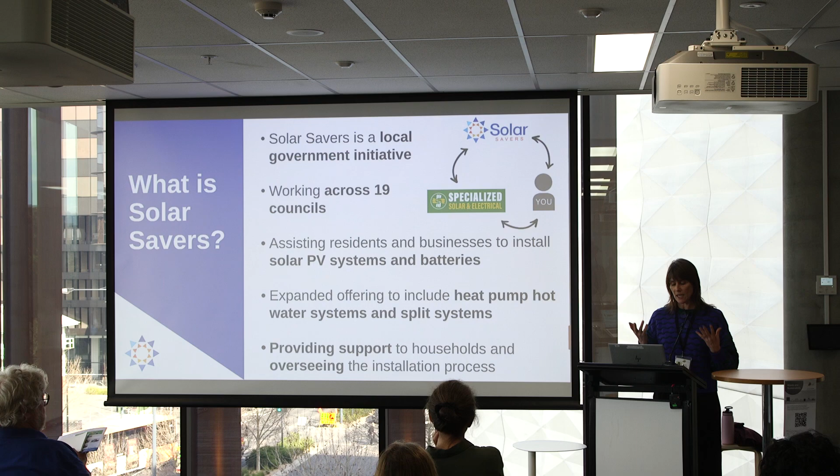Our program provides support and we oversee the installation process from start through to completion. So if you have any queries, we're here to help you along the way. So why would you install with Solar Savers?

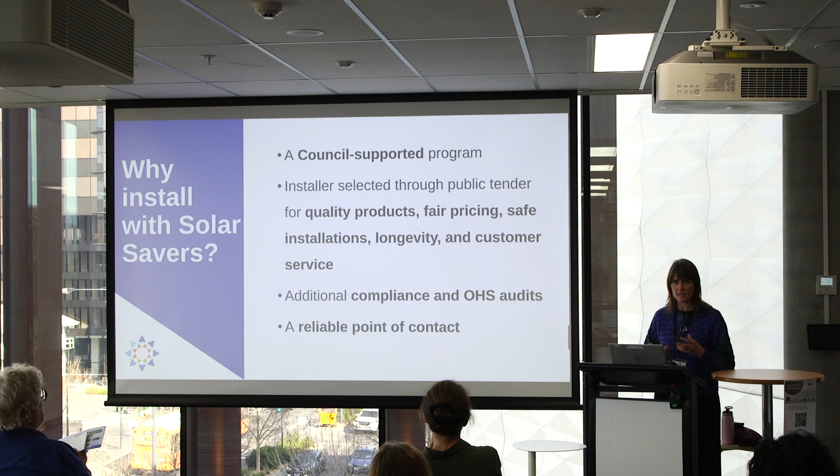Firstly, we're a council-supported program, and we've selected Specialized Solar and Electrical through a public tender process. So through those tender processes, we vet... I'm sorry, you can't hear me?

No, that one there? There we go. Is that better? Yep, yes, sorry. All right, so we've selected Specialized Solar and Electrical through a public tender.

When we went through that tender, we invited several solar companies to apply, and we vet and rate them on their quality of products, fair pricing, OH&S for safe installations, and longevity, making sure they're going to be around for a long time, and negotiate longer warranties as well, because that's really important. We also look at customer service, so actually having a really good customer journey.

In addition to that, our program organises compliance audits. So 5% of all installations, I organise separate audits to make sure that all the systems are installed properly and according to regulations. Your systems are going to be on your roofs for 20 to 30 years, so you need to make sure that they're done properly and safely as well.

I also do OH&S audits as well, making sure that all the installers are behaving, installing safely on your property, and making sure that when they're on site, no one is going to get hurt. We're also a reliable point of contact, with a team you can call or email with any queries along the way. So that's why it's really important to come through the council program as well.

Thanks, Anna. Good morning, everyone. Firstly, I would like to thank you all for joining us today to learn a little bit about the Solar Savers program. My name is Samira Hughes. I am the Chief Operating Officer of Specialized Solar and Electrical.

I'd also like to introduce you to Raymond Hughes. He's our Director of Sales. He will be coming up shortly to take you through to learn a little bit about how solar works, and the products that are available and on offer through the program. So that's just a little bit about us. Thank you so much for attending today. So let's start here. So who are we?

Originally established in 1984, part of the Specialized Heating and Cooling Group, we are a family-owned business. We've got 6 offices across Victoria and New South Wales.

Since the turn of the century, so going on 24 years now, we have helped thousands of households and businesses transition into that all-electric future, going from gas to electric. We help people reduce their energy bills and also reduce their carbon footprint, and we're really grateful to have assisted so many people through that journey.

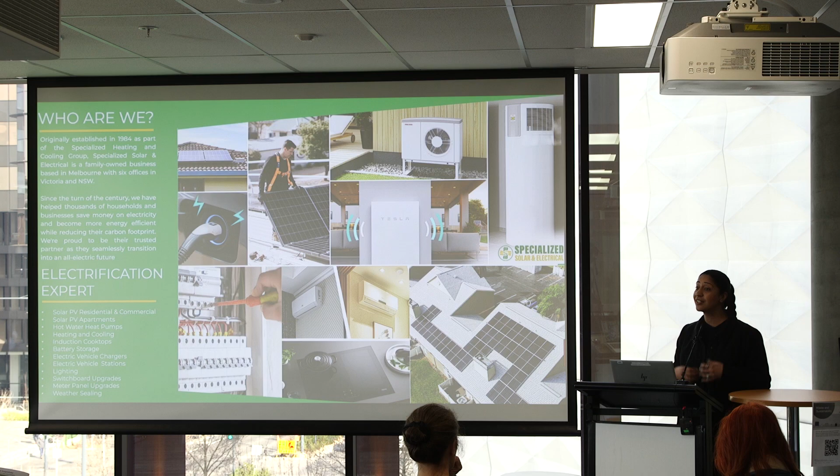We don't just do solar, so we classify ourselves as electrification experts. The reason is we do everything that encompasses electrification for you to transition. Through this program we have solar, batteries, heat pumps, split systems, a few different products on offer, but we also do induction cooktops, switchboard upgrades, and electric vehicle chargers and charging stations. Another reason is because we understand that it is difficult to transition into that all-electric future.

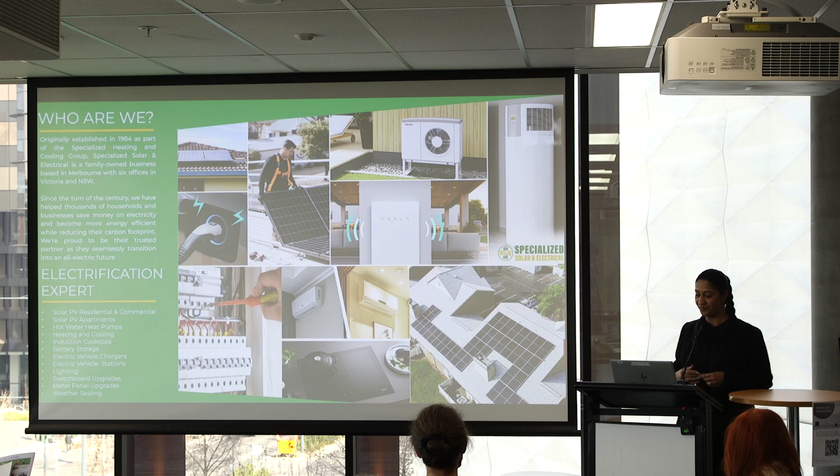So we basically become your partner for life. We know that this doesn't happen overnight either, so we're here to assist you along the journey. Whether you can do something like this straight away, or it takes you 10 years, we help you through that process. Okay, so that is a little bit about us.

So let's launch into it. A lot of the information that you're going to see on these slides is being obtained from Rewiring Australia, so there is a little source website at the bottom. If you haven't gone on Rewiring Australia before, it's got some great information, but some of this is where we pull this information from.

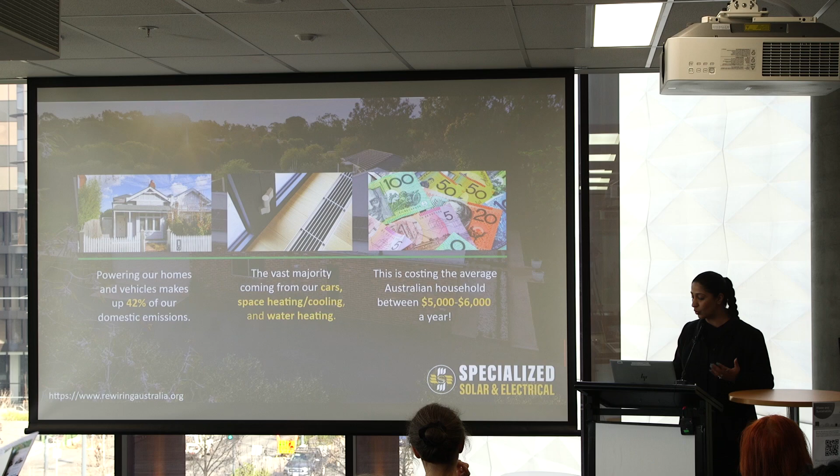Powering your homes and vehicles makes up 42% of our domestic emissions. The vast majority is coming from our cars, space heating and cooling, and water heating. This costs the average Australian household anywhere between $5,000 to $6,000 a year. And again, these are essentials — these are things that we do require, heating and cooling, as well as hot water at home.

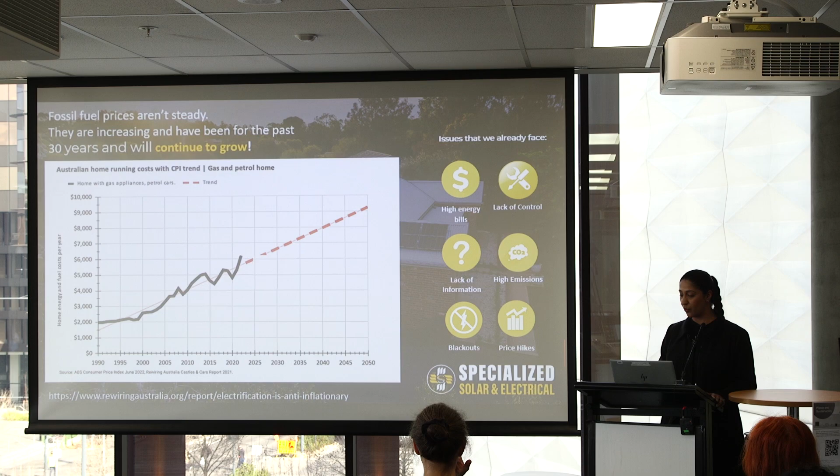Blackout protection — now we are facing blackouts. I know only a few months ago there were so many Victorians that didn't actually have any electricity for close to 3 weeks. So we are definitely feeling the effects of blackouts, high emissions and high price hikes. There's quite a few issues that we're already facing today when it comes to energy.

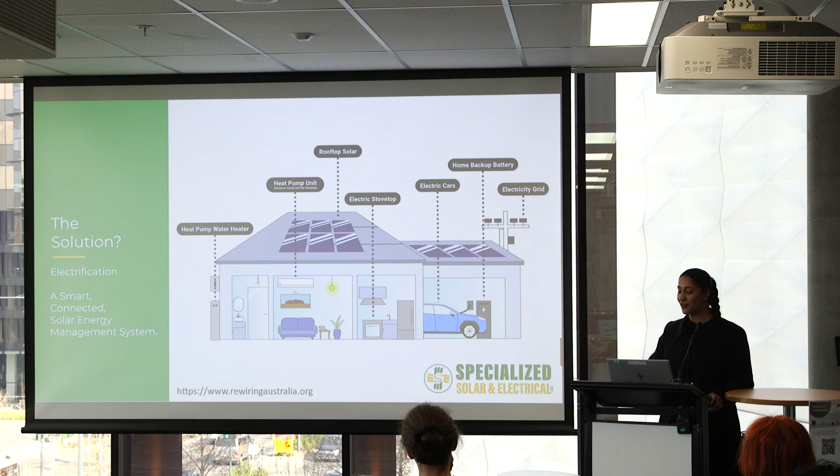So what's the solution? It's definitely electrification — a smart, connected solar energy management system. This is an image we got from Rewiring Australia, basically showing what we want to achieve when it comes to a full electric home. You can see solar panels on the roof, a hot water heat pump on the side of the home, split systems in the house, induction cooktops, an electric vehicle in the garage, battery backup storage, and you're always connected to the grid — unless you do off-grid systems, but with your home you're usually connected to the grid.

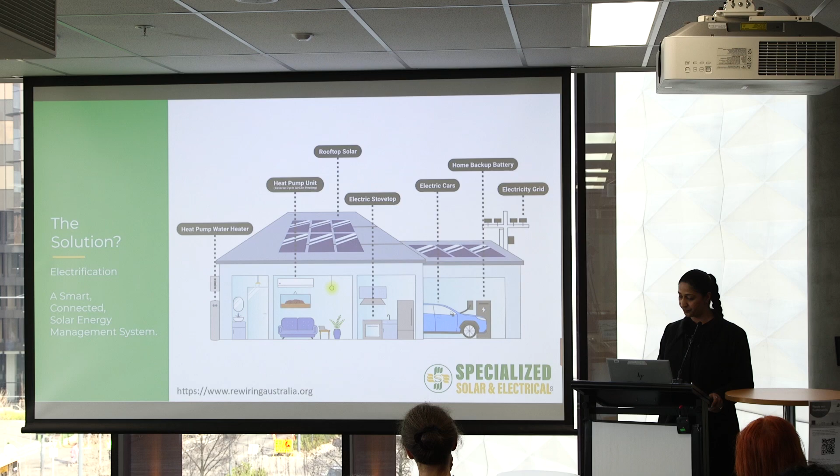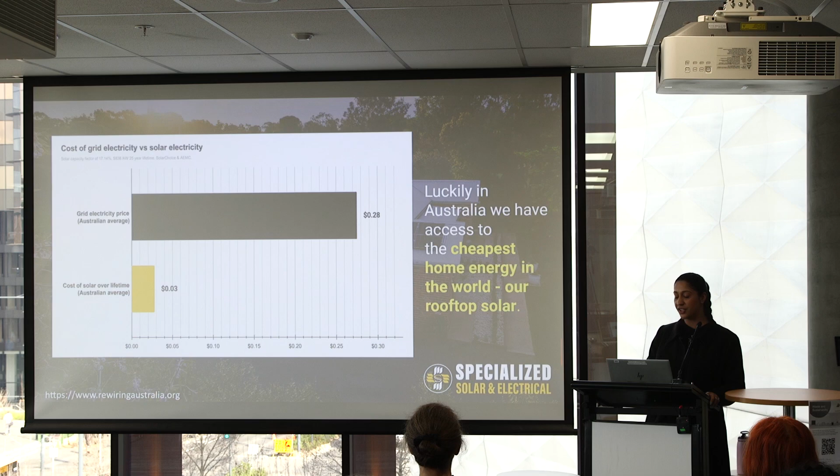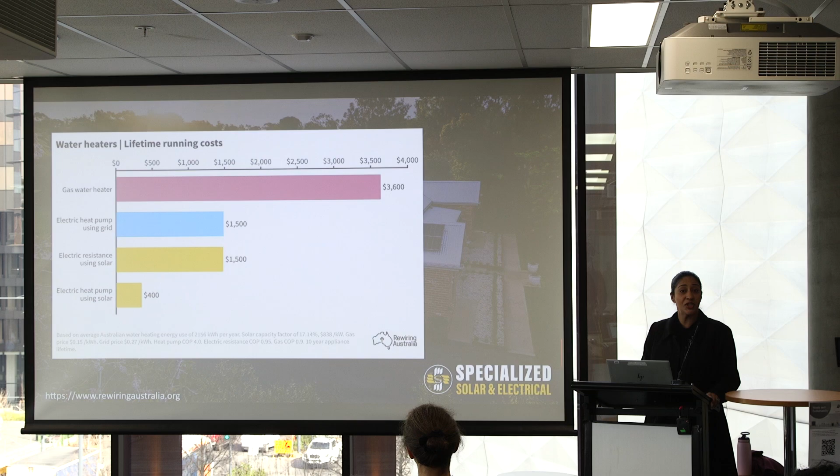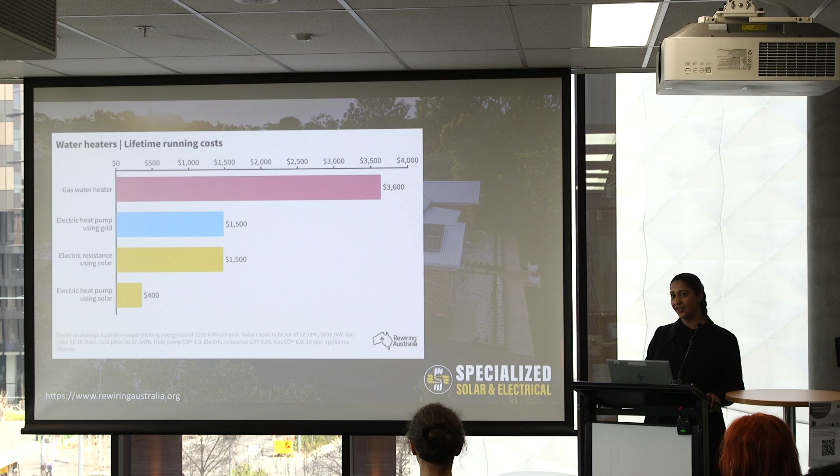When you're looking at water heaters, this is something we offer through the Solar Savers program, which is the hot water systems. These are the prices you'll see over the lifetime running costs for different types of heating and hot water systems in a home. If you look at gas water heaters, it's close to the $3,600 mark. Electric heat pumps using the grid, $1,500. Electric resistance using solar, $1,500. And then electric heat pump using solar, $400. So again, big savings, big difference by going all electric.

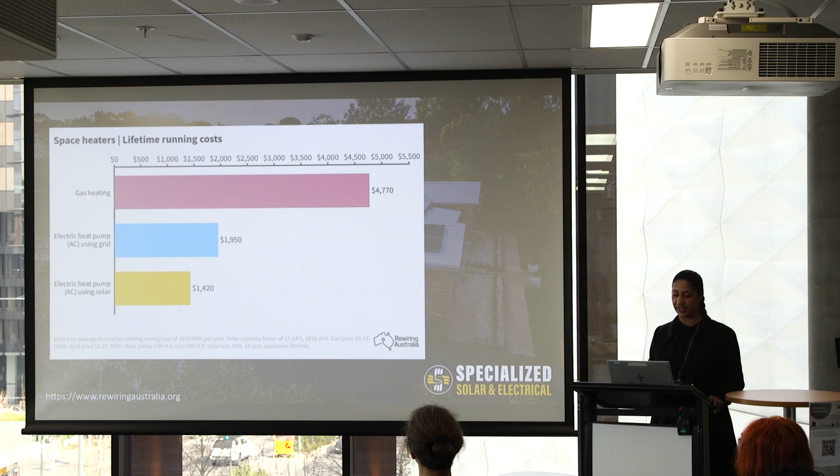Space heaters, again, gas heating is $4,770 on average. Your electric heat pump using the grid is $1,950, and going on to using solar, $1,420. So again, really significant savings. Saving from electrifying your home continues to grow.

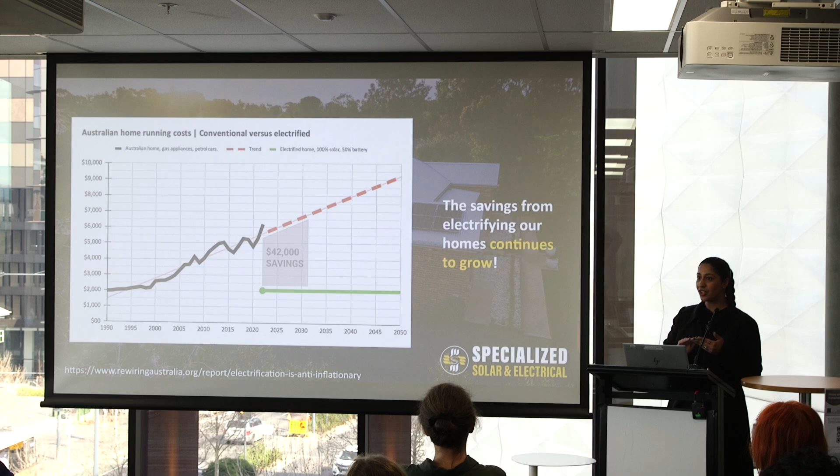Just reflecting back on that graph I showed you earlier—this is a compounding effect of savings too, because when it comes to fossil fuels, that price keeps rising. But if you do solar, which is that green line there, it's consistent, and you're able to take control of that because you're having a relationship with your solar.

A lot of people ask me, Samira, what's the return on investment when it comes to solar? The reality is, if you manage your energy usage—how much you are producing and then consuming—you need to be able to consume that energy in your home. It's consistent and steady, and you have full control of that because it's your own renewable energy source on your roof. So the compounded effect within savings is quite significant.

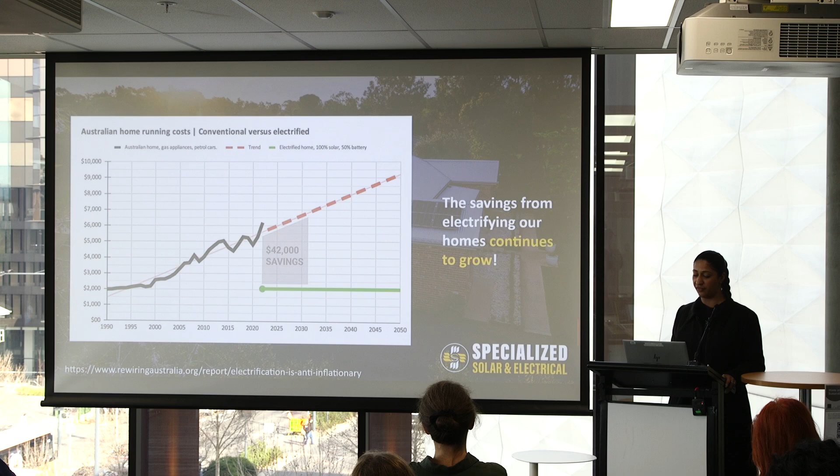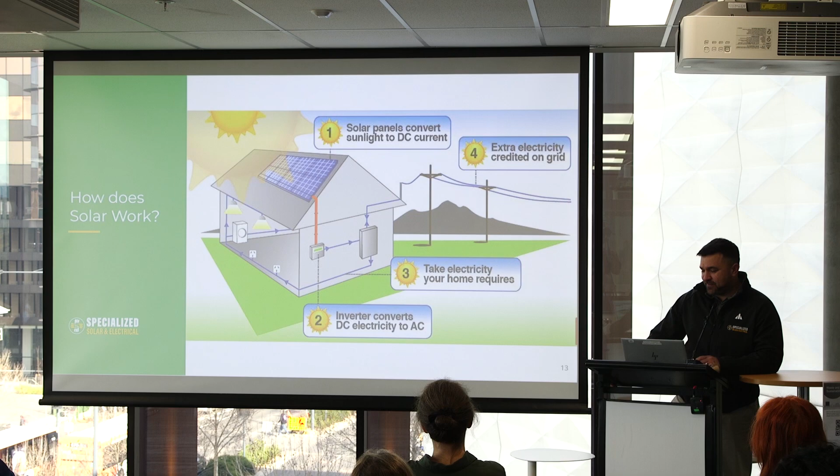Hello, everybody. So I'm going to go through all the products and how solar works and how it affects the home in a positive way. As you can see, our graph here is a very basic setup. There are three entities of a solar system: your panels, an inverter, and if you can, a battery as well.

The house takes the energy first, and anything that overflows from there goes directly out to your grid. But if you've got a battery in the middle, it will capture that until it's full. This is pretty much how a battery works.

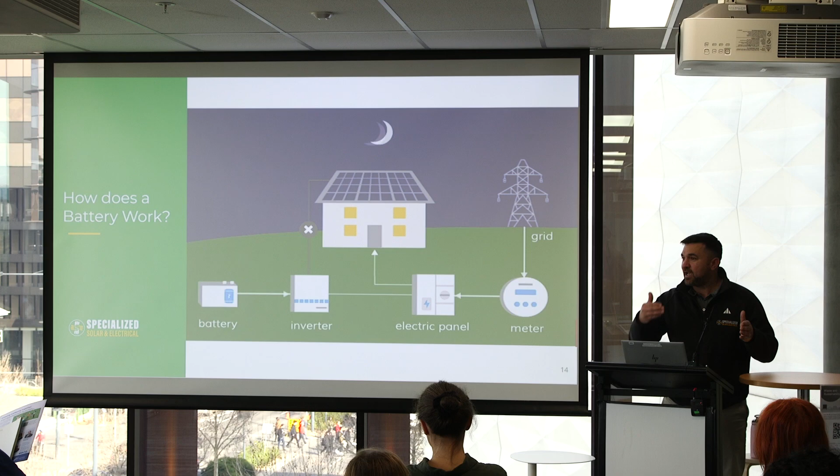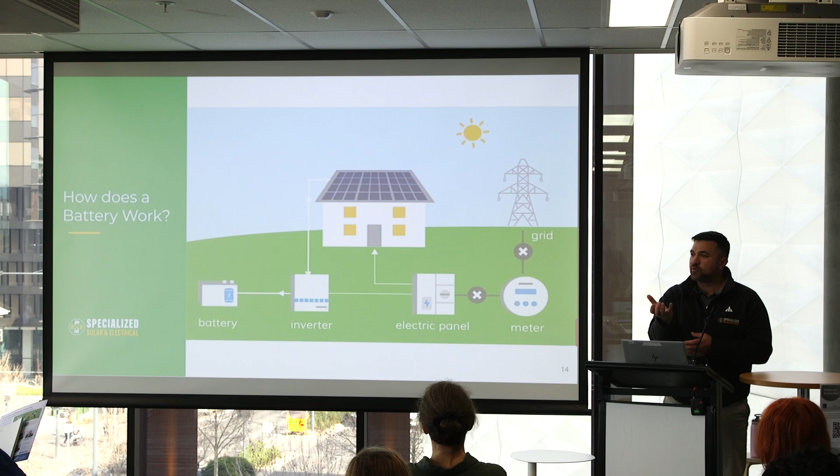So whenever you put solar onto your property, your house takes all the energy first—so we were talking about consuming your solar. Most people would challenge their habits a little bit; we call it being solar savvy. Very simply, your house takes all of the energy, and whatever excess is left over will trickle, as if you're pouring—think of glasses. You can fill a glass up and the overflow gets caught by a battery. You then fill that battery up. Once that battery is full, it will then overflow back out into the grid. So it's just a capturing device that allows you to capture sun, so you can use it at night.

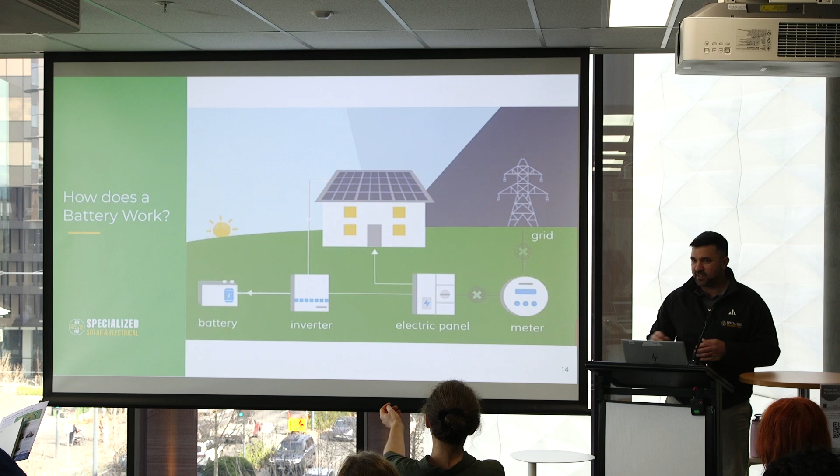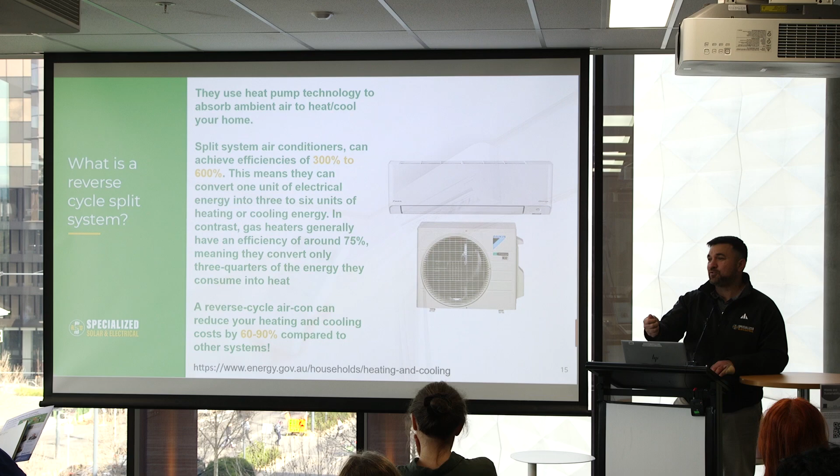Efficiency products that we can use within the house—this is a split system. They use heat pump technology to absorb the ambient air to heat and cool your property. Split system air conditioners can achieve efficiencies of 300% to 600%. An easy way to think about this is for 1 unit of energy, or for $1 that you spend, you're getting $3 back up to $6 back. So it amplifies the amount of energy, and that's where the efficiency comes in.

So 1 unit of energy in, and you're getting anywhere between 3 and 6 units of energy back for your house. That's the efficiency rating. Gas heaters generally have an efficiency of around 75%, meaning they only convert three-quarters of the energy they consume.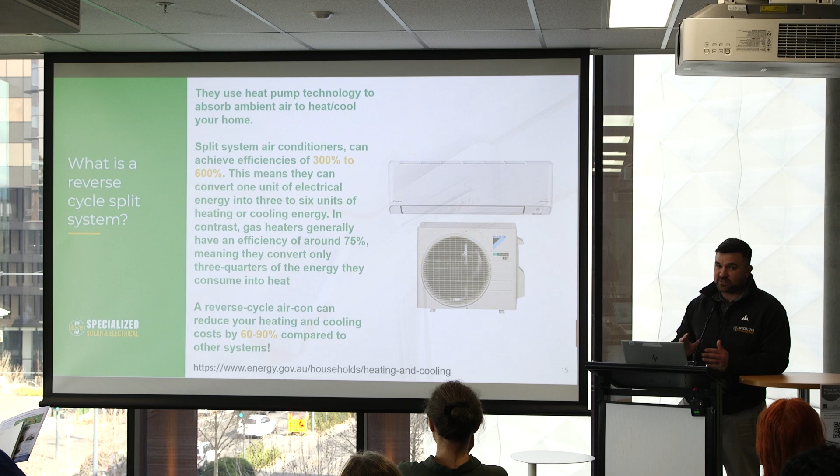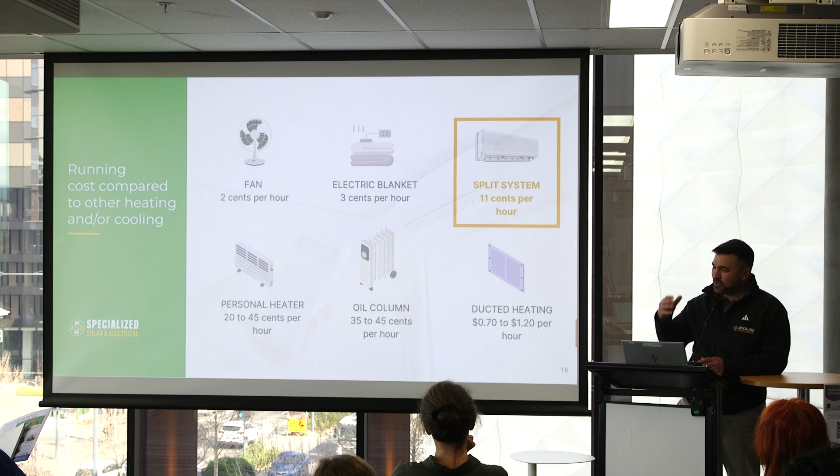A reverse cycle system can reduce your heating and cooling costs by 60 to 90%, depending on when and where you use it. Just to give you a comparison, this is a nice simple way to see it. I know fans and electric blankets aren't exactly efficient things to warm or cool your house, but I wanted to give you an idea of cost ratings.

If you run your fan, it costs you 2 cents an hour to run. An electric blanket is 3 cents. Your heating and cooling through a split system or HVAC is by far the most efficient way to heat and cool your house, and that's 11 cents an hour. Then everybody's got their personal heaters, 20 to 45 cents, oil columns, 35 to 45 cents, and ducted heating up to $1.20.

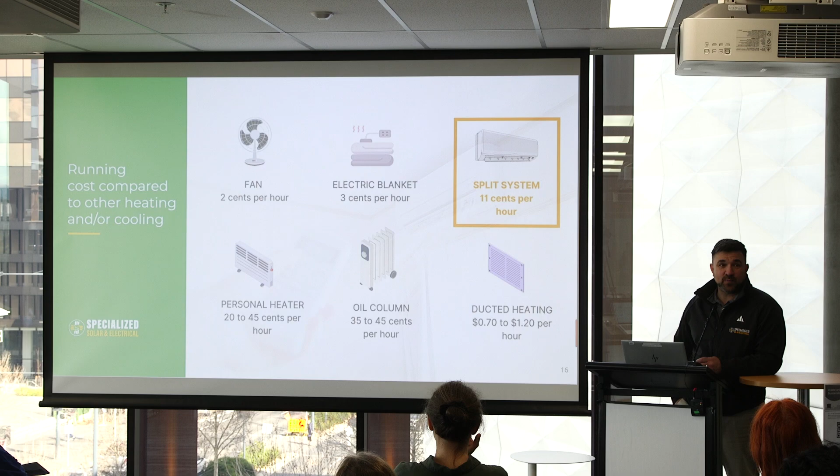Heat pumps absorb heat, so this is the same thing, just using that heat pump technology we just explained, but instead applying it to heat your hot water instead of using gas. It does the same thing, using the warmth from the outside air and transferring that heat into the water, which then heats the water up. Heat pump water heaters are highly efficient.

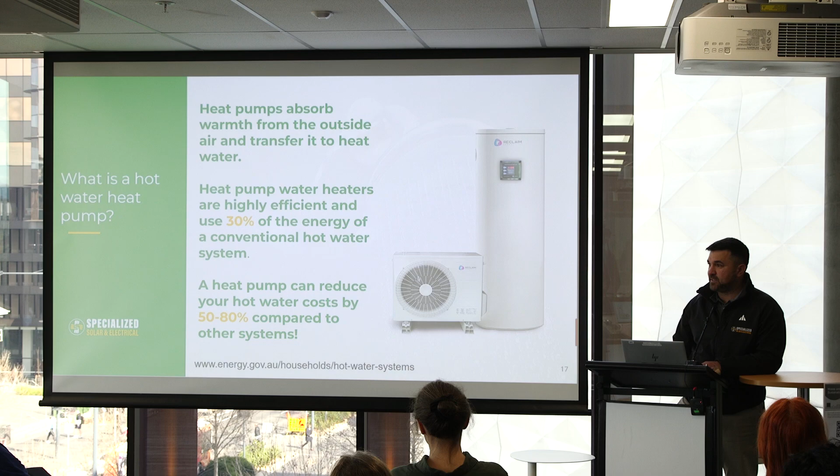They use 30% of the energy of a conventional hot water system. One unit in, you're getting about 3, depending on which product you use, 3 to 5 units back into the water. A heat pump can reduce your water heating costs by 50 to 80%, sometimes even more. That's a good average to work around.

This is just a nice clear picture of what happens. It uses ambient air, energy in the air. The heat pump concentrates this heat. The cold water goes into the heat pump, heats the water up using this, and then transfers back to the top of the hot water system, heating from the top down, using refrigerant for the cold water by heat exchange inside the compressor.

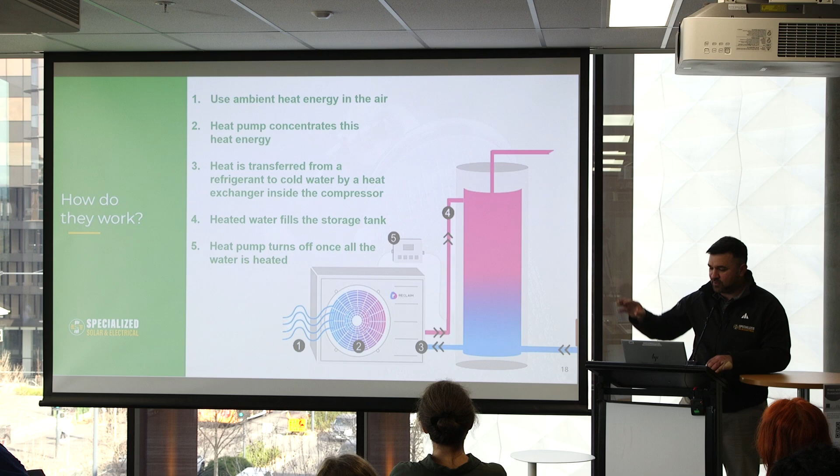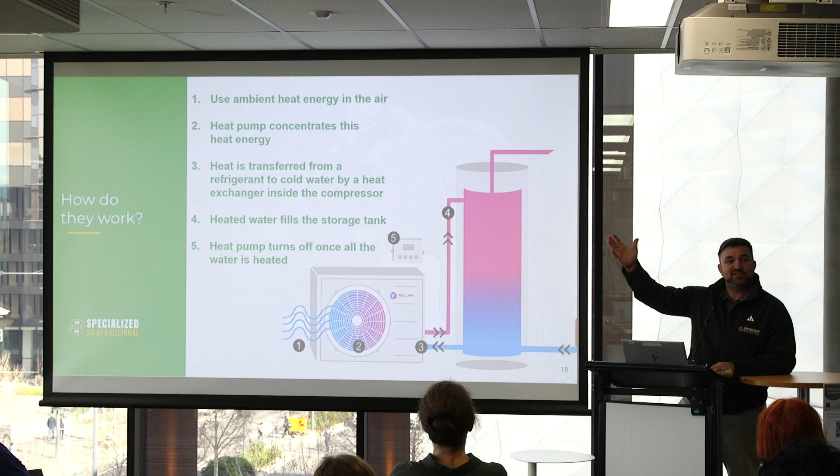Like I was saying before, the heated water fills the storage tank from the top, and heat pumps turn off once all the heating is done. It's insulated, so it doesn't work continuously all day long, and the heat pumps we offer can actually be set to work and coincide with your solar system, so most of the time you use the excess energy from the solar to cover the usage. So it's guilt-free usage, actually.

Panels - we have two panels that we're offering through the Solar Savers program: the JA solar panels and the REC. Both of these panels are all black. They're beautiful, they look fantastic. Both of them supply a 25-year warranty, so you'll have a minimum of 25 years' worth of energy out of it. And both of them are Tier 1 companies. If anybody explains Tier 1 to you, it specifically means the company has been vetted and is financially stable, so they're not going anywhere.

A big importance as well about panels selected within the program - for us personally, the companies need to have a strong Australian presence. They must have offices within Victoria or New South Wales. Both of these do that.

Where these panels differ is that the JA Solar is a high-produced Chinese panel, while the REC comes in with slightly better efficiencies. Every panel needs a certain amount of energy to switch on, and we call the REC the CEO of panels, just because it turns on sooner, meaning less light needed to switch on, so it switches on earlier and lasts longer in those nice summer sunsets. But also, everything works on a great day - on the really good days, we want a smaller footprint to produce a larger amount of energy, and that's where the REC beats the JA Solar. But both panels do exactly what they say on the tin.

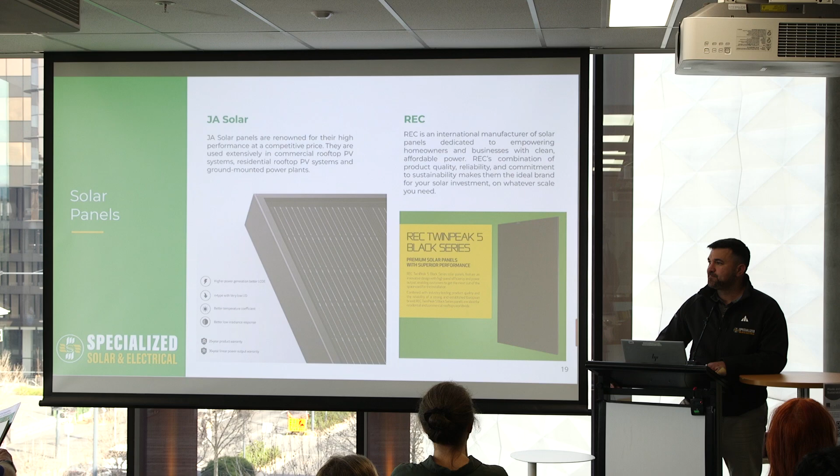Basically, where is the REC panel made? Norway - the raw materials come from Norway, and the factory is in Singapore. So that's the route they go through.

It's a Norwegian company - yes, it's mined out in Norway, all the minerals, and then that's assembled in Singapore. That's where the factory is based.

Who wants to guess what the most important part of a solar system is?

You got it. Inverter - it's the brains, the heart, and the soul of the operation. I want you to think of panels and batteries and electric vehicle chargers and splits - all of those are just appendages to this wonderful system.

There are 2 types, and both are fantastic, that have been chosen to be part of this program. You generally get - I'll start with Sungrow. Sungrow is what we call a string inverter.

I don't know if you guys remember the old Nokia 3310 mobile phones. They were renowned for being bulletproof, absolutely reliable, very simplistic, and easy to use. That was what made them fantastic. I likened that to the Sungrow, because that's pretty much what you're going to get from it.

Bulletproof doesn't do it justice. It's very good at what it does, very simple and easy to use. But the caveat with its simplicity is that if you had to place the string down on the ground and you put 1, 2, 3, 4, 5 panels, it cannot distinguish panel 1, panel 3, or panel 5 from each other. So it sees all those panels as one solid panel. What that means is if one panel is affected, they all are affected - it's always working at the lowest panel's output. So that is the caveat to going with a string inverter, but it is absolutely reliable and it works fantastic.

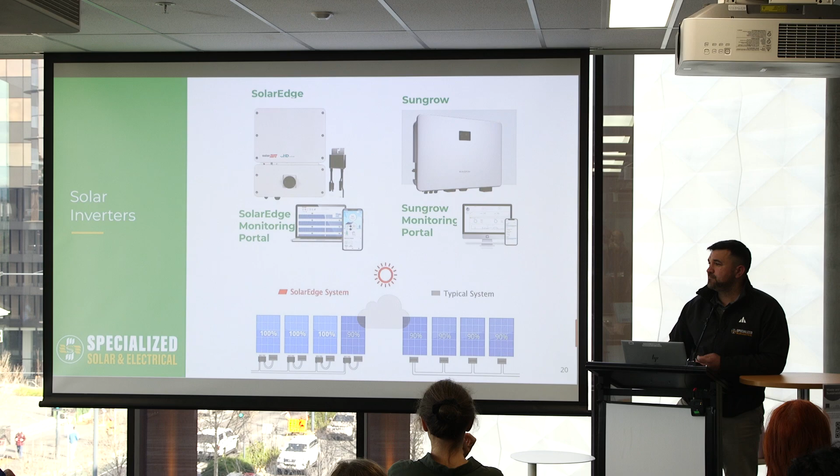Right, next we've got batteries. There are 3 types of batteries that we use. I'm going to start off with the Tesla.

The easiest way for me to say this is every battery comes with an inverter. You're either going to have a battery-only inverter or a hybrid inverter that comes with that battery. So let's start off with your Teslas.

If you've already got a solar system, you've had it for 5 years, and your inverter and solar system are working fantastically, we don't want to change that. When that comes into play, you can put a Tesla in, and the Tesla has a battery-only inverter.

Very simply, its inverter or gateway will be able to chat with yours, any and every inverter on the market that it can chat to. It tricks that inverter into thinking that it's the grid, and then they chat and it takes complete control over it.

So the Tesla actually monitors the weather that's out there. It'll be able to regulate. If it knows there's not going to be much sun tomorrow, and it has excess energy, it will hold on to that. There's a whole lot of suppliers out there now that it can chat directly to, and in some cases even spin off extra energy for you. It is a very, very clever system.

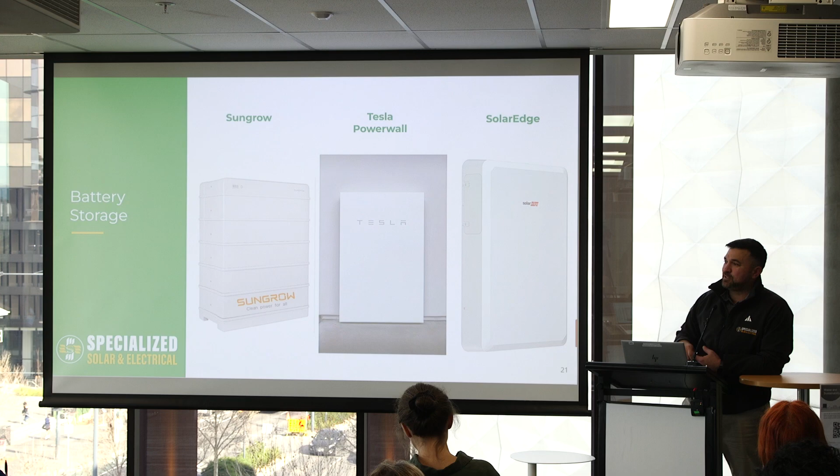So if you've got an existing system already, I'll connect the Tesla to it. If you've got a Sungrow, you can either choose the Tesla or the Sungrow, whichever you prefer. Same with the SolarEdge, you can either stick a SolarEdge battery onto it, or put the Tesla on. The difference here is that this Tesla is 13.5 kilowatts out the box, a SolarEdge is 10 kilowatts out the box, and a Sungrow is modular.

So if you are looking to grow your ease of use and grow your battery stacks, I would go to Sungrow, as you can grow it in smaller increments of 3.2 kilowatts a stack.

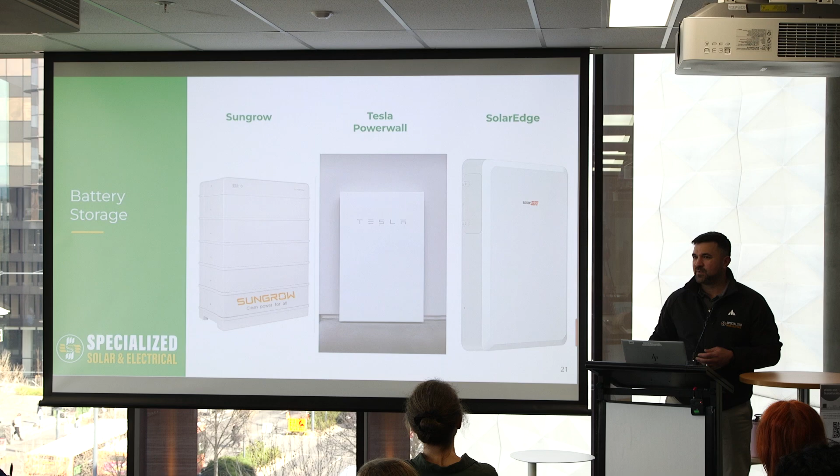Right, next we've got hot water heat pumps. Hot water heat pumps are a great way to heat your water up efficiently. Like I was saying earlier, you get anywhere between 1 unit of power in gives you 3 to 5 units of energy into your water. We call it a thermal battery.

So what that means is, let's say you can't afford the battery at this stage, which is fine. So what else can I do to use my excess solar in the home? We will then suggest doing your hot water system, because you'll reduce your gas bill there by 50 to 80%, as we said from Rewiring Australia.

We will have your hot water system tied to work off your peak solar energy, and any excess energy you have will then heat your hot water up. That's where you would use your excess solar in different ways.

It's just a question with the heat pump. Basically, it works by storing the warmth from outside air. It uses the ambient air to heat the water - it's a long explanation. Do you want me to give it to you afterwards, let me finish, and then we can chat about it? I don't want to waste too much time on that.

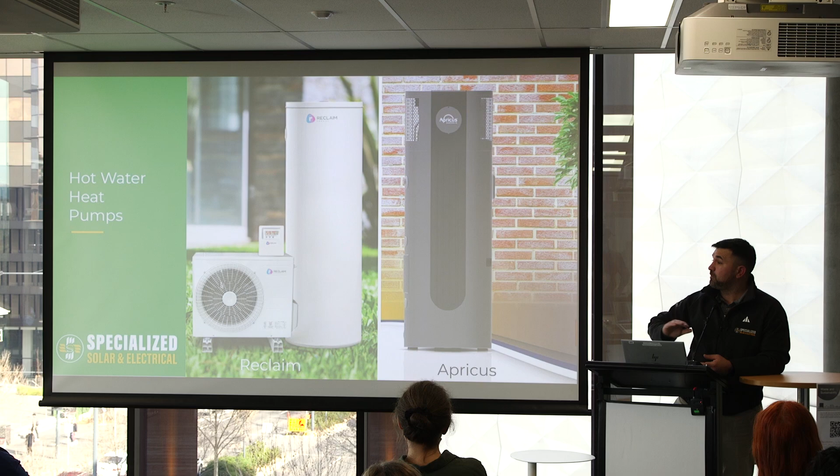110 liters every hour from cold - I'm talking about when you first install it, it will do 110 liters an hour. It will take about 4 hours just to get it started.

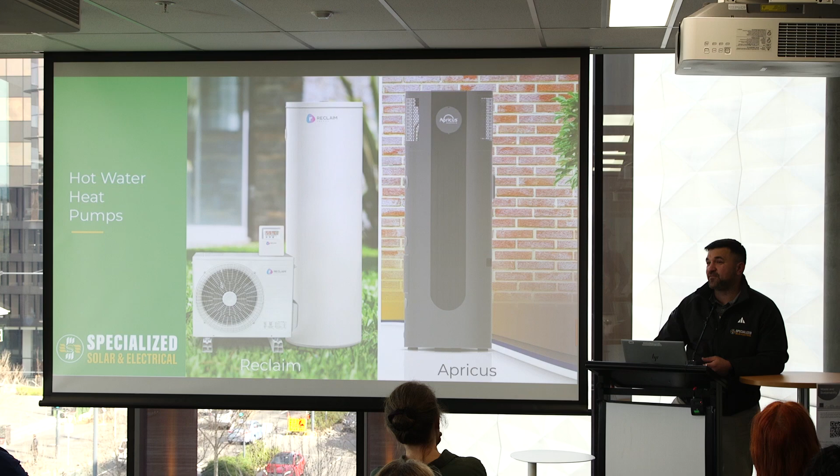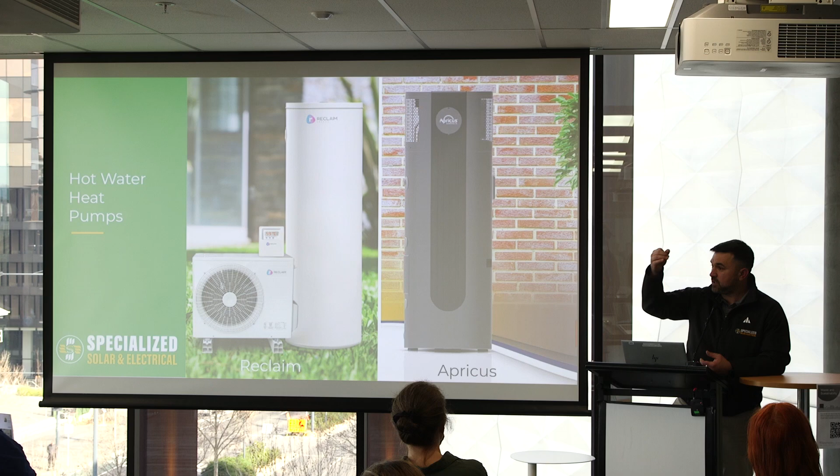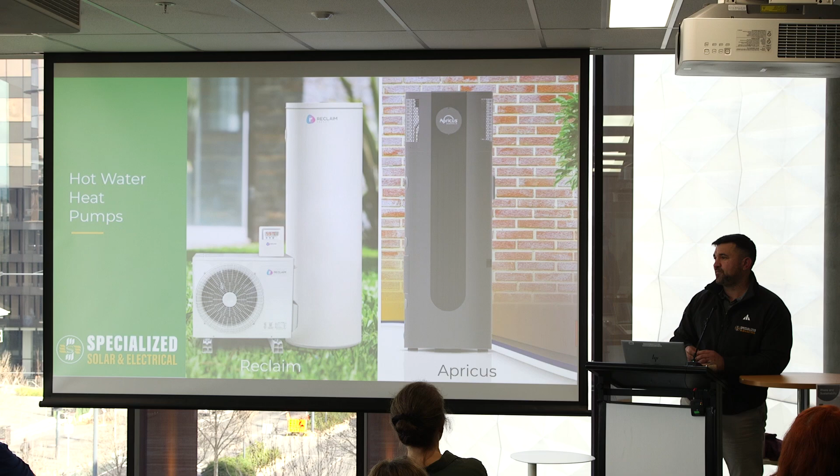Why would you choose glass over stainless steel? You don't have to monitor the water in a glass lined tank. Depending on the impurities in the water wherever you are, a steel tank doesn't have this, but the glass tank has an anode, a sacrificial anode, which takes all that up. With stainless steel, you don't have that, and you've got to monitor the water going into it. Most people choose glass lined because the 10 year warranty on those is perfectly fine. It's more of a personal preference if you decide to do stainless steel.

Same thing goes for the Daikin and Fujitsu units we offer in the Solar Savers program. They use a condenser from the outside, and this is by far the most efficient way to heat and cool your property, whether in a lounge or bedrooms, wherever you decide to place them. You've got a lot more control over them because you don't have to heat the entire house when you don't want to.

So it's just you and your wife at home, and the kids come over maybe 2, 3, 4 times a year with the grandkids. You don't have to heat the whole house when you're not there, but when everybody's home, you can heat it up. So you can manage the heat much better that way. Also, it's efficient because it uses the condenser - remember, 1 unit of power in, 4 to 5 units of power out. It's just a lot more efficient to get your home heated and cooled through that.

The two products that they use here are fantastic. They've got a great track record, and they've got good warranties that come into play as well.

What's the difference between the old reverse cycle air conditioners and the new ones? It's just how efficient, a couple of differences. It's the gas that gets used inside - everything now is natural gases, so if anything does happen, it's in an enclosed piping system that heats and cools. And the way those condensers work, the efficiency levels are just unheard of. It's really, really efficient, so it's just doing the job at a better rate.

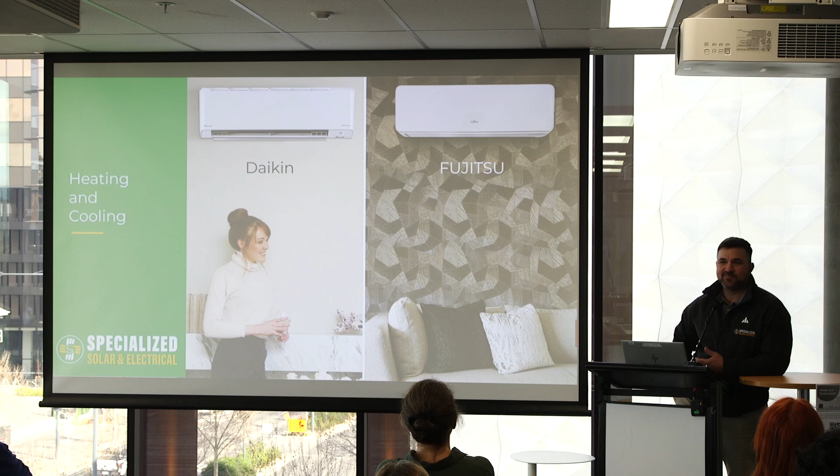Again, we provide amongst the best warranties in the solar industry. I think that was one of the favorable things about coming across to us - we have an extremely good track record when it comes to customer service, doing exactly what we say. If you do a little bit of homework on us, I implore you to go read our reviews, so it's not just coming from me, you'll notice that as a company we do exactly what we say on the tin.

The warranties you get through the Solar Savers program are amazing. For every year that you service the system, you get a guarantee of the power output. That means for 10 years, the power that's been promised to you can be received. There's 10-year warranties on the inverters, up to 25 years warranty on the panels, and then there's an outstanding 15-year workmanship warranty.

We've been installing solar, electrifying homes since the turn of the century, going on 25 years now, and that's just us doing that part of the industry. We know what our workmanship does, we know what stands the test of time in products, and we understand what our guys and our ladies are all capable of doing. You just won't find a 15-year workmanship warranty anywhere else in this industry.

So your inverter's affected by the amount of heat, let's say, on the western wall facing? Yes, the heat does affect them. You'll notice that a lot where they've been mounted right next to the switchboard and cooking in all that heat.

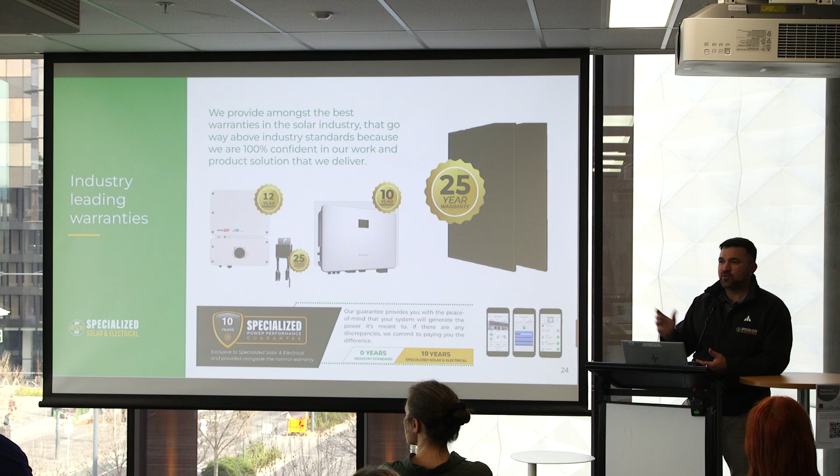So the question is, if I've got my meter outside and my switchboard is either inside the house, which we won't put it next to, or it's in the garage where you can put it next to, where would you place the inverter? You'd place it as close to the main switchboard as you possibly can. You just can't do it in the house - we'll create a solution, we'll do something else for that. But if your switchboard's in your garage and the battery's out and your meter's outside, we focus on the main switchboard.

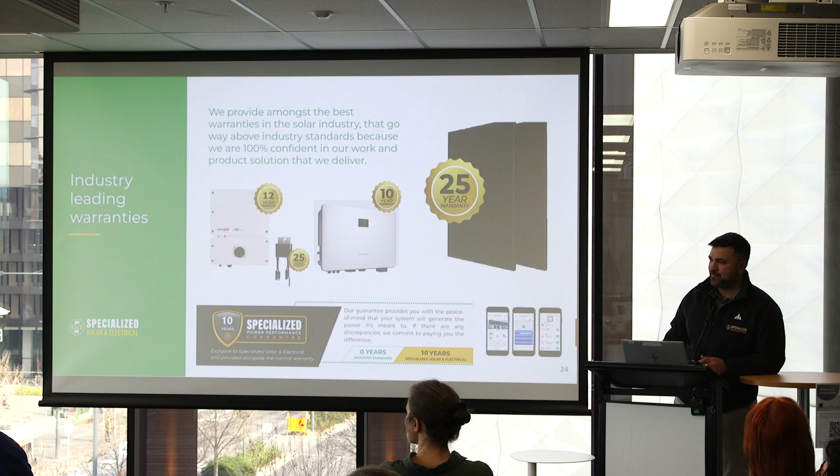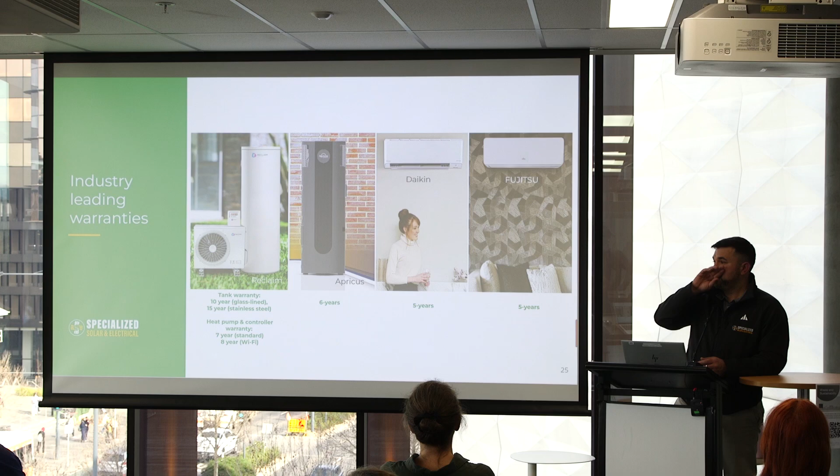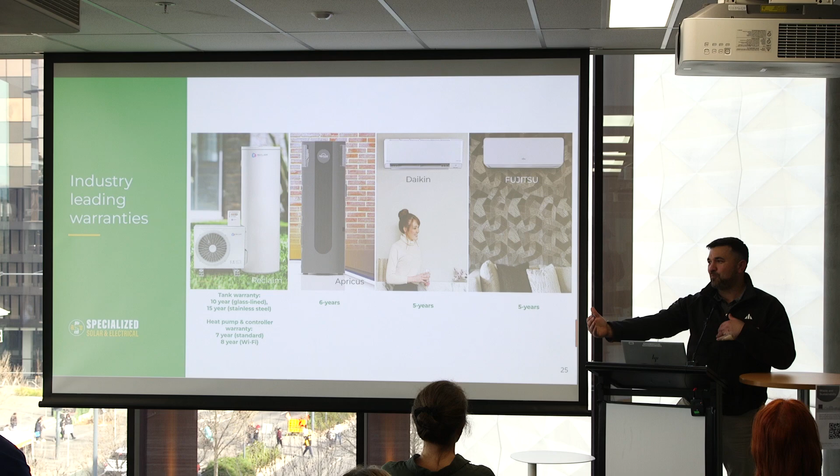Can you oversize your inverters? You oversize for two reasons. The term is actually called oversizing. So what it means is if I have a 5 kilowatt inverter and I put 6 kilowatts of solar on, will that affect my warranty? No, you can oversize. Solar Edge can be oversized up to 300%, depending on what its battery is. So in the mornings, when there's low light, you can capture a lot more energy with a bigger footprint, and you can work through that. You will always be able to oversize it.

I just want to get through this, and then we can answer all the questions later. So these are the products that we've got. Tank warranties are 10 years for the glass-lined, 15 years for the stainless steel. Heat pumps and controller warranties are 7 years standard, with 8 years on the Wi-Fi models. Those are the products that you get to choose from.

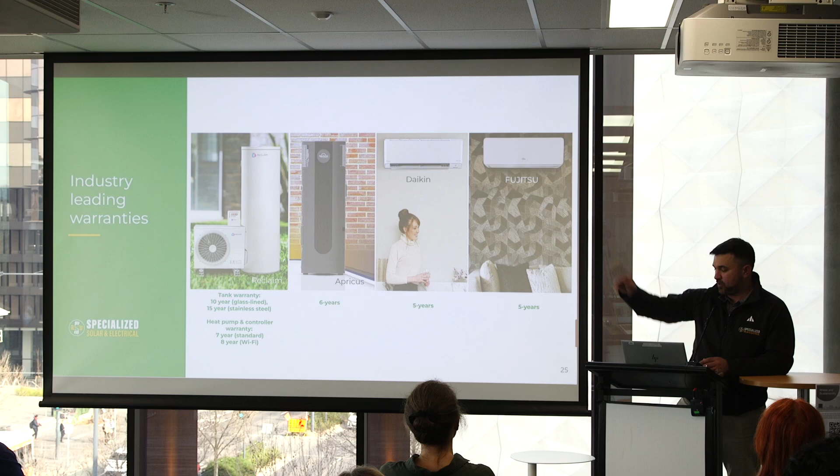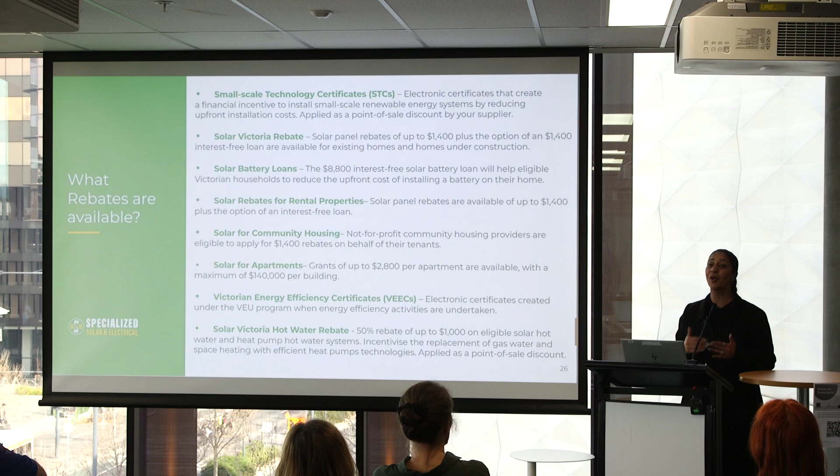Let's just quickly go through the rebates that are available. Now, I know this is a lot of information, so please know when you register for the Solar Savers program and come through to us...

We do, as Raymond mentioned, a discovery session with you. We discover all about you and your needs, because every single person is different, every home is different. So we sit down, discuss that with you, understand your requirements, and then tailor design that system for you. Anything to do with rebates or the product will be discussed with you, so please know it's very transparent. If you've missed anything, we'll go through it again during that time.

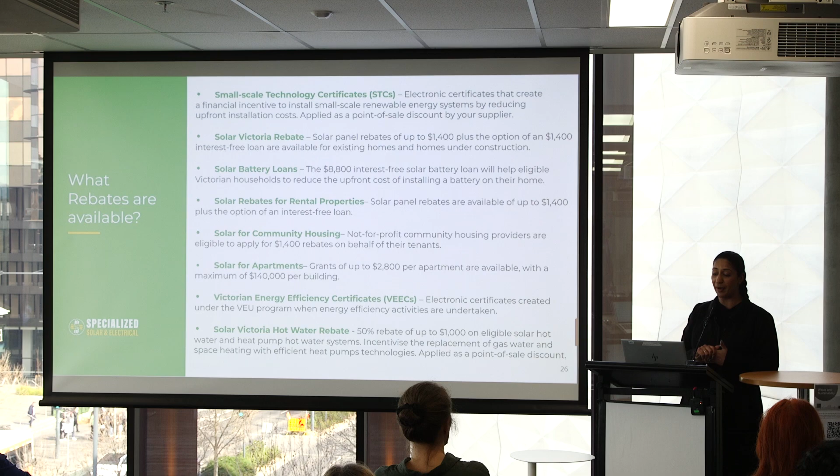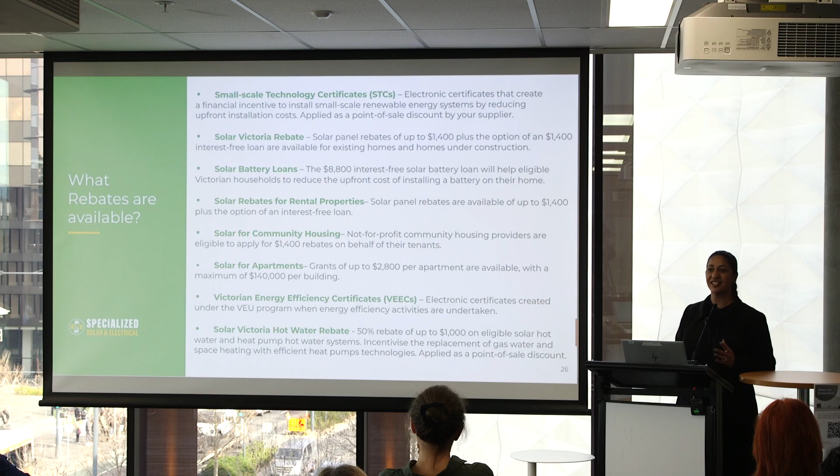But let's just quickly go through the rebates that are available. We have the small scale technology certificates, the STCs. This is a point of sale discount, and you'll automatically see this being generated on your proposal. Basically, these are for renewable energy systems - it's just an incentive if you are installing those, things like solar.

The next one is the Solar Victoria rebate. So you have two different things that come from the Solar Victoria rebate here. You've got one which is a $1,400 rebate, and then the second is a $1,400 interest-free loan that you're welcome to opt into.

Next one down, we're really excited about this because this is probably the biggest rebate that we've seen for batteries to date. There is an interest-free loan available through Solar Victoria of $8,800. It really assists with that upfront cost, so you can definitely opt into that.

We have solar rebates for rental properties. Again, I think this is fantastic - if you are a landlord and you have tenants in your home, this is such a wonderful way to look after them and help them. Cost of living is so high, and you can leverage this rebate not once, but twice every financial year. So if you have more properties in your portfolio, you can do two properties and leverage this rebate, which is the $1,400. There's also an option for the interest-free loan, which is $1,400 as well.

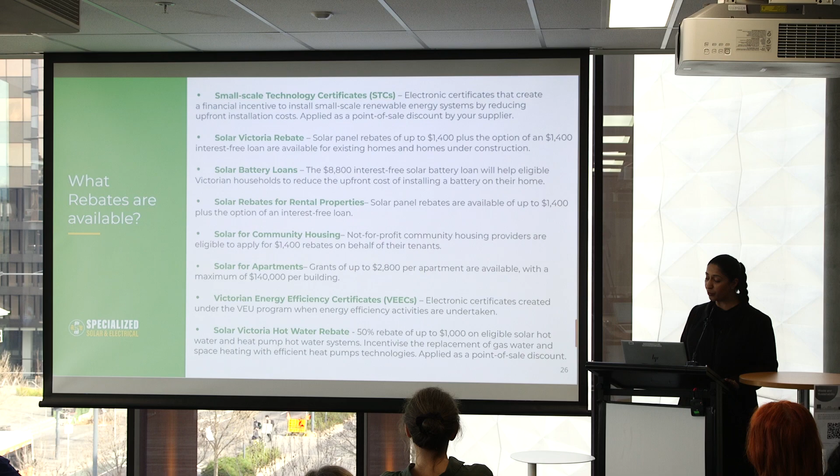You've got solar for community housing. This is for non-for-profit community housing providers - again $1,400. You've also got solar for apartments.

This, again, is an industry first. Prior to this, anybody that was in an apartment building was not able to leverage any form of rebates for solar - it was only if you had a home, not an apartment. Now they've got this available where you can get $2,800 per apartment in an apartment building, and up to $140,000 for the entire building. So if you know anybody that's in an apartment, or if you're living in an apartment building, know that you do have this opportunity.

Now, there is a bit of a process behind this. We have done this before, and we can definitely assist you with this process and speak to your AGMs and so on. We'll definitely go through that process if this is something you would like to do.

The next one down is VEEC, Victorian Energy Efficiency Certificates. As Raymond mentioned, you can get this for your energy efficient appliances such as your split systems.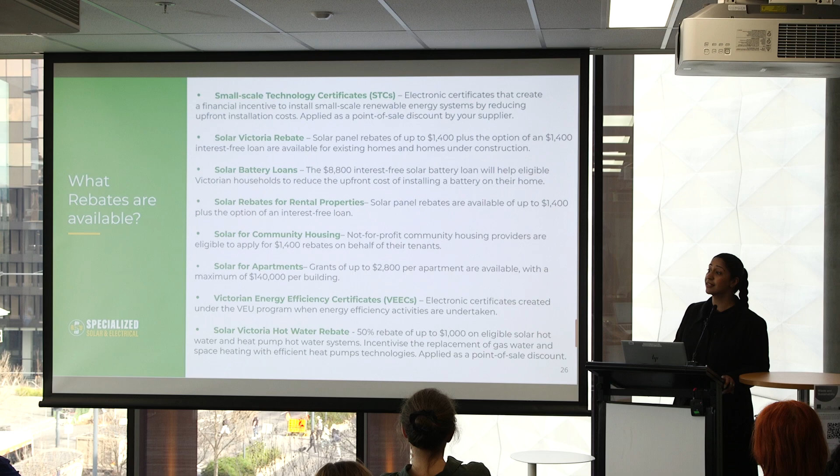Now, again, this all depends. The amount of VEEC rebate you get depends on what actions you're taking. If you're decommissioning a gas system in your home, you'll get more rebates, because they incentivize that. If you're just placing a split system in your home without decommissioning, which you can do, you still get a VEEC, but it's a lesser amount. We'll go through all of this with you once we get to the discovery stage and understand what you want to do in your home.

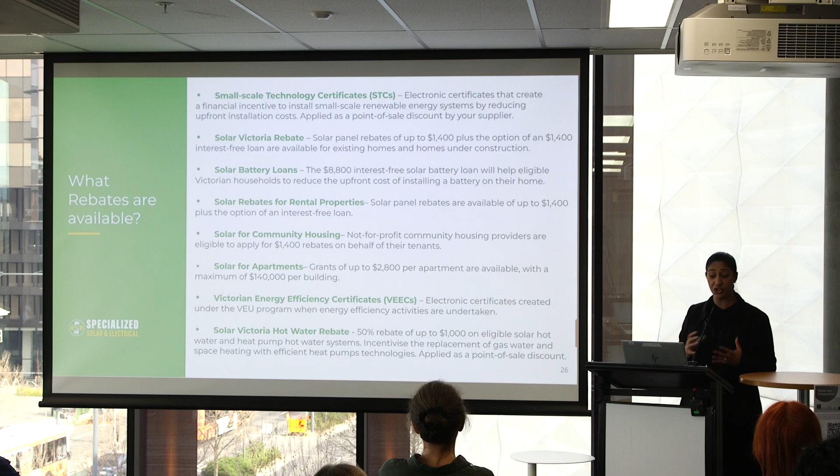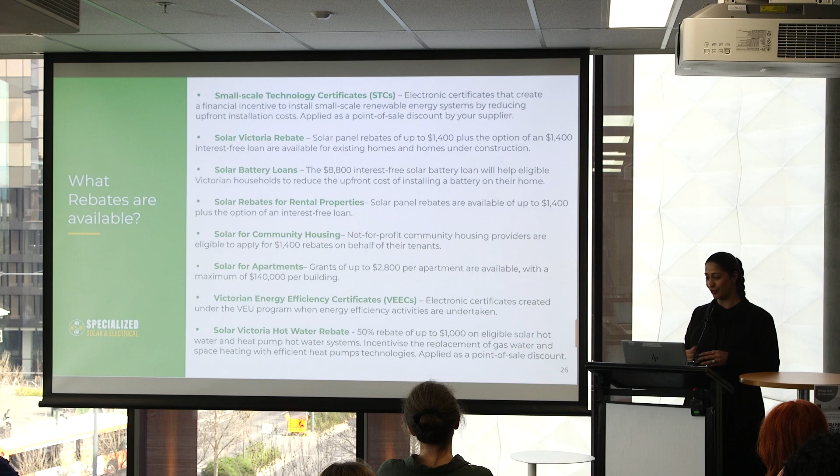The last one is the Solar Victoria hot water rebate. It's a 50% rebate of up to $1,000, so if your system is over $2,000, you get that $1,000 rebate from Solar Victoria for your heat pump. Those are all the different types of rebates available. I know it's a lot of information, so when you get to us, we'll advise which ones are available for you.

Lastly, with the solution offered through the Solar Savers program, we're really lucky - there are so many benefits. If you opt for a battery, you have blackout battery protection. All of our batteries have blackout protection, usually backing up your essentials, like your lights and your Wi-Fi, if there's a blackout in your home, or if the grid goes down. That's definitely something we're able to do.

You also get protection against price fluctuations. The reason is because you have full transparency - you have your own independent renewable energy source of solar generating your own energy on your roof, allowing you to control that energy usage. Because of that, you're reducing your bills, and you have that protection against price fluctuations because you have that control.

You also get a reduction in your carbon footprint and help protect the environment. This is probably one of the biggest benefits for me personally, because it's such a wonderful way for all of us to play a part in the future. There's a lot we could potentially do, but just having solar generation on your own home reduces the carbon footprint and protects future generations and our planet. It's a beautiful way to protect our environment, and again, you lower your energy bills.

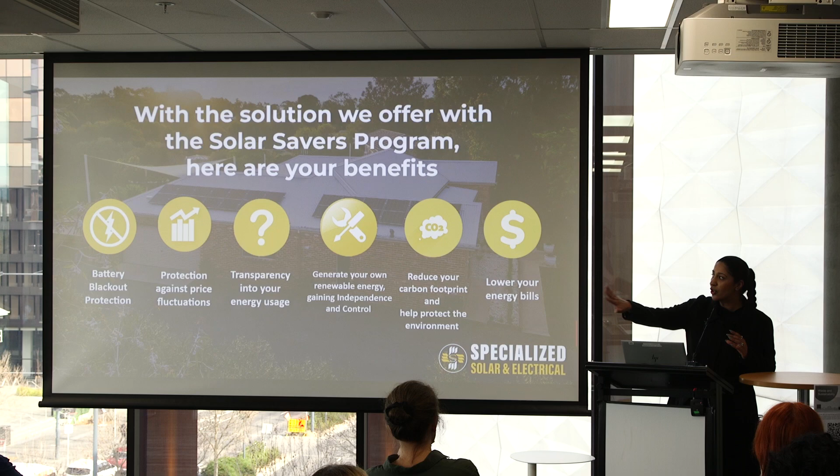As I mentioned, everybody is very unique and different. When you come to us, we'll analyze and assess your energy usage and your bills, then tailor that system to get all these benefits. That's what the program offers. Now I'm going to hand you back to Anna, who'll take you through the next few slides and the process of registering. Thank you.

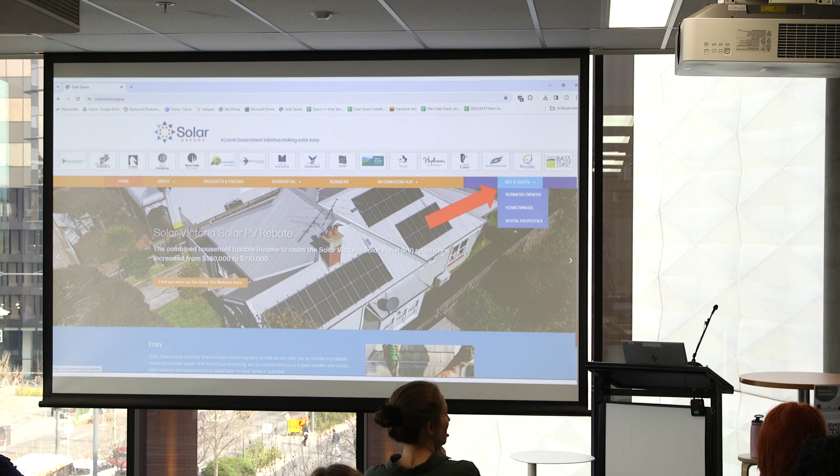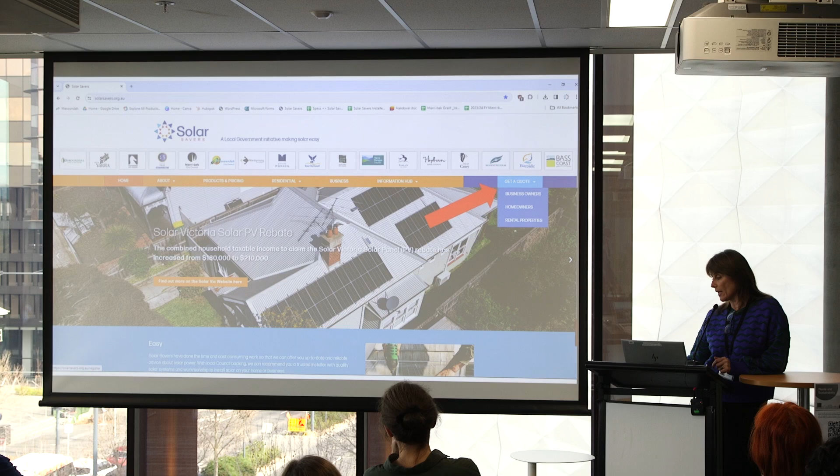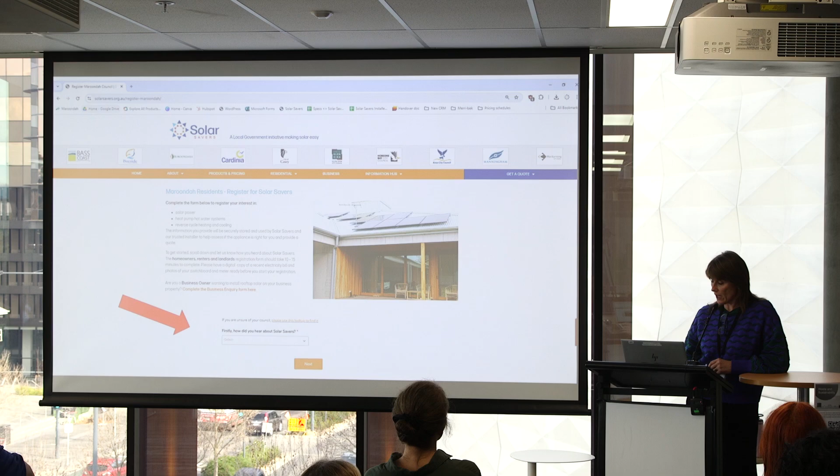I hope that answered the broad questions, but if you're interested in getting a quote and chatting to them, the best way is to hop onto our website and click 'Get Quote.' Select homeowners, then choose Maroondah City Council, and it takes you through our form. The application does ask for pictures of your switchboard and meter, and for you to upload your electricity bill. If you can't do that at the time, that's fine - we can do it later, but it's always helpful to have all the information at the start. That'll go through to Specialized Solar, and they'll contact you within about 2 business days to work out a time for a discovery call where you can sit down and work out what you'd like to do. That's the best way to log in.

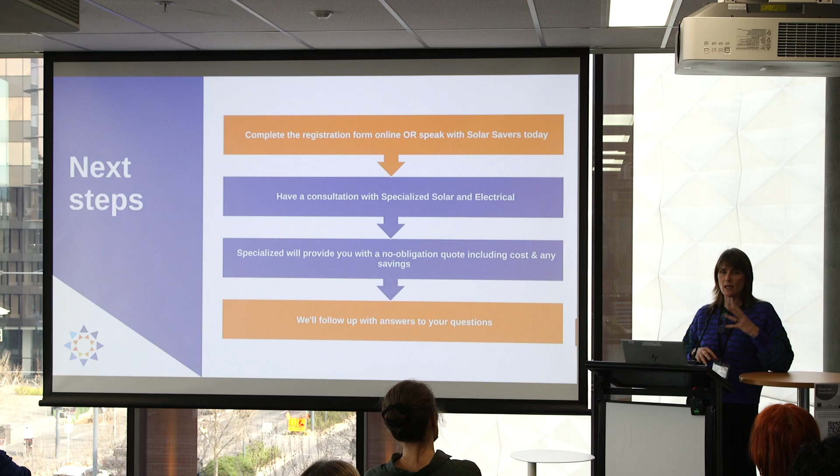Then, as I said, you'll have your consultation, and they'll give you a no-obligation quote. We'll go through that, and what's great is that on the quote, you're bound to have a lot of questions. So Specialised will set up another time where they'll present and sit down with you, either on a video call or over the phone. You can ask all the questions and go through the quote, and find out if this may not be for you or if you want something else. That's great.